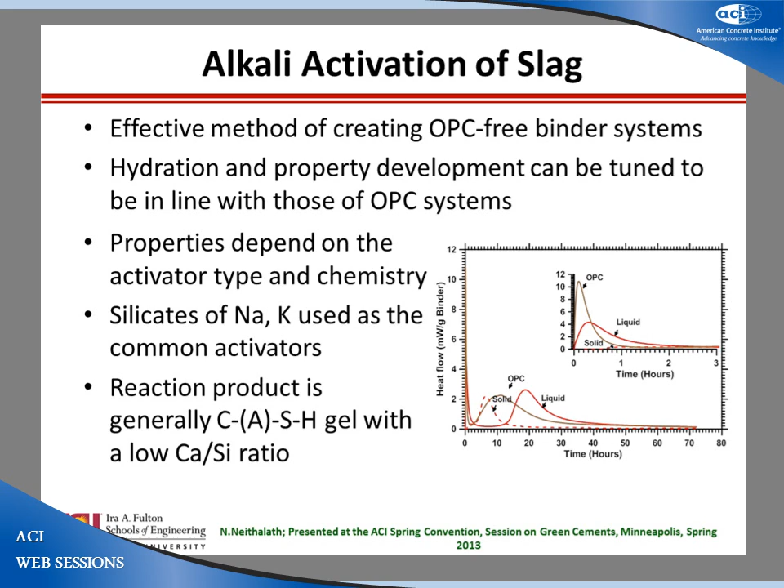We talked in the morning about the activator type and chemistry influencing the process. Typically, sodium and potassium silicates are used. The reaction product is a calcium aluminosilicate gel with a low enough calcium to silica ratio, with sodium and potassium incorporated in the system. But what we are trying to look at is how the long-term microstructure of this material changes, and how that in turn affects the chloride transport.

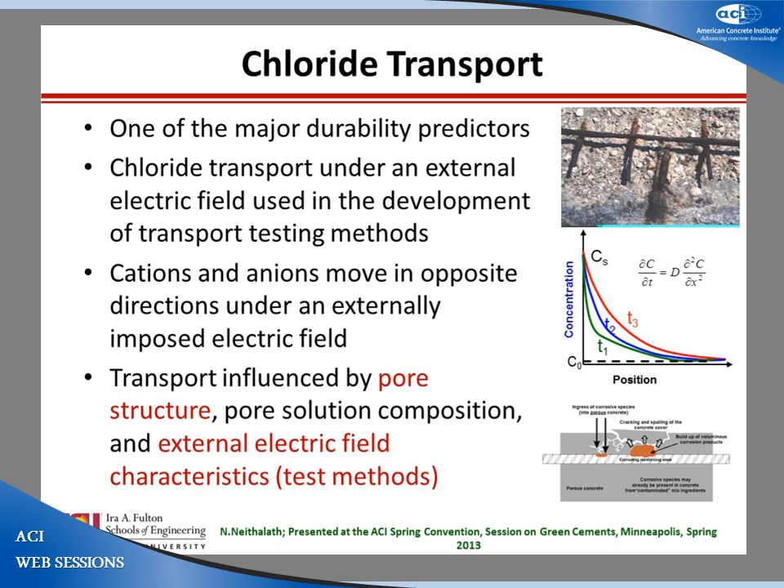We know that chloride transport is influenced by the pore structure, pore solution composition, and the external electrical field, depending on what kind of accelerated test method you use. This presentation looks at two different types of activating alkalis. Typically, sodium silicate or potassium silicate solutions are used because they are better activators. But from a constructability point of view, powders are also better because you can make a one-component, just-add-water system. So we're looking at blends where you use a powder activator blended with the slag.

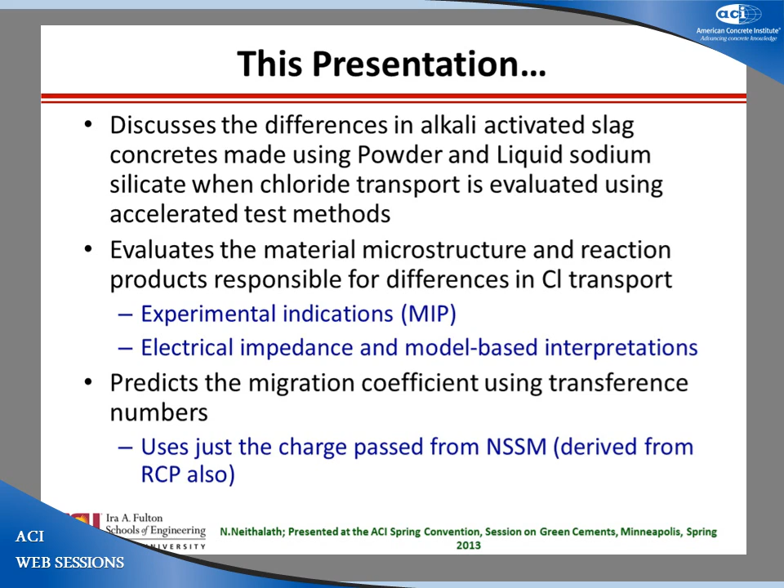But how does the microstructure change with that kind of activation? We look at material microstructure, experimental studies using mercury intrusion porosimetry, and electrical impedance with associated model-based interpretations to show what is happening in the microstructure before and during transport. That gives you a simple method to predict the migration coefficient. This is universal; we have developed it for all types of concretes. I'm just showing the case for alkali activated concrete.

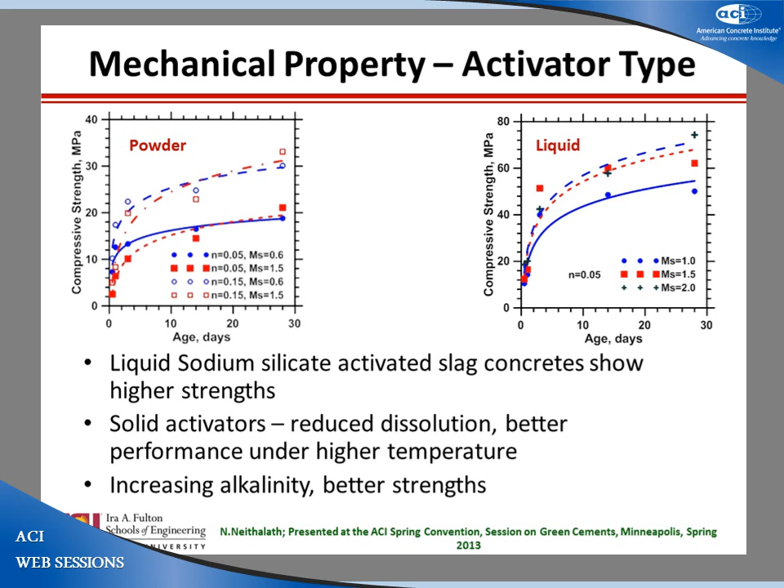Two different slag contents, a total alkali content of 0.05, or 5%, and a higher one for powder too. Sodium silicate with a silica modulus of 2; sodium hydroxide can be used to bring it down to 1.5. Sodium silicate liquid has silica modulus of 2, 1.5 and 1. We did three, but these two are the commonly used numbers. For compressive strength, powder activated mixes give only about 30 megapascals. With liquids, you can go to 80 megapascals or higher depending on the slag. With solid activators you have a reduction in the dissolution. The compromise is a system you can work with quickly without storing liquid separately.

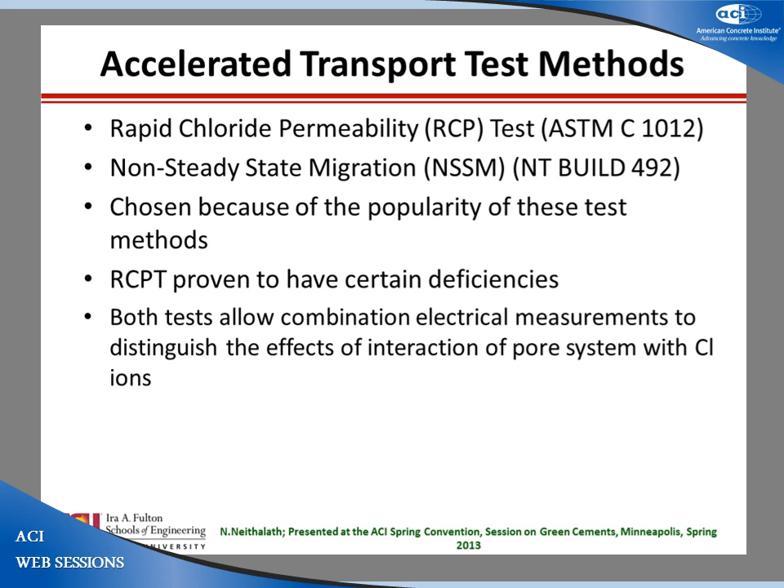For accelerated transport tests, we did the rapid chloride permeability test, which everybody seems to like, and non-steady state migration to get the diffusion coefficients, chosen not for pure science but popularity too. We know RCPT has deficiencies, but the advantage is that both are electrically accelerated, so there are similarities we will make use of in understanding what they do.

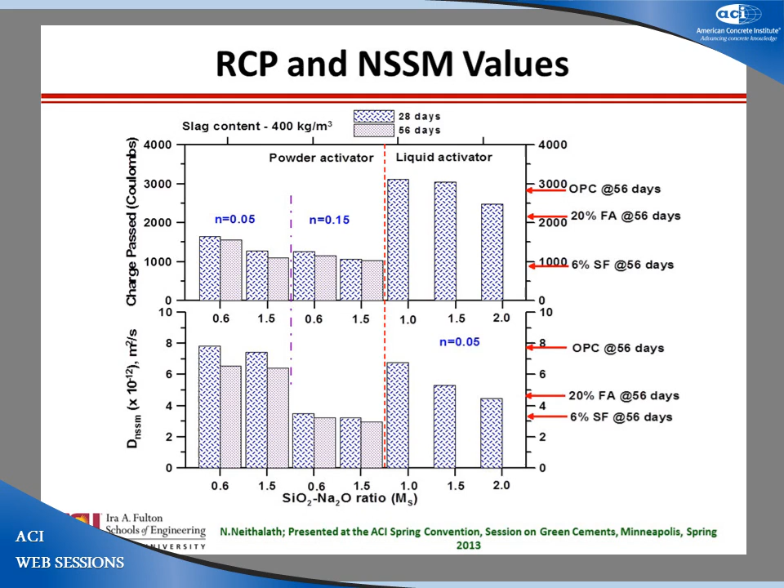So here are the observations which I just told you about already. The important one is that there's no significant change when you have powder activation between 28 and 56 days. It doesn't seem to do anything further. Same trend was seen in the compressive strength results also.

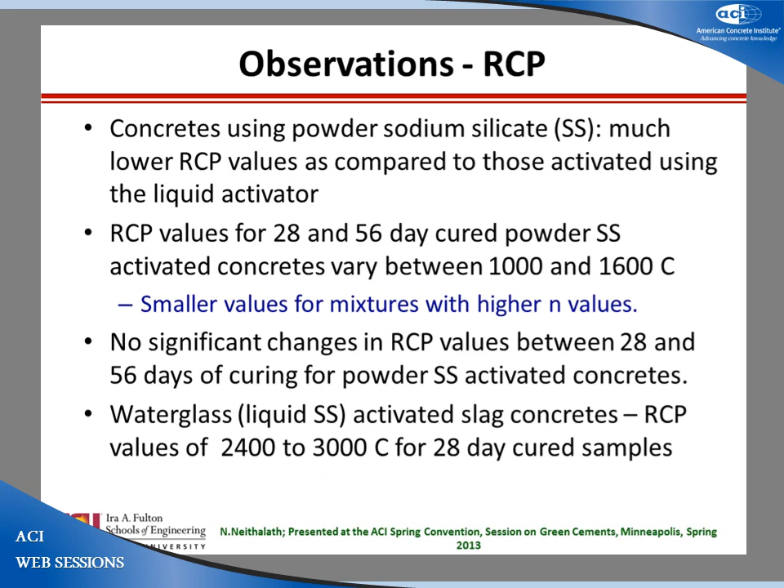With non-steady state migration, again, the results are now much more in line with what you expect. You don't see a dramatic drop for one type of concrete, but the reduction with liquid activated or solution activated sodium silicate increases with the silica modulus or silica content more than the reduction in RCP values, and we'll talk more about that when we do the microstructure.

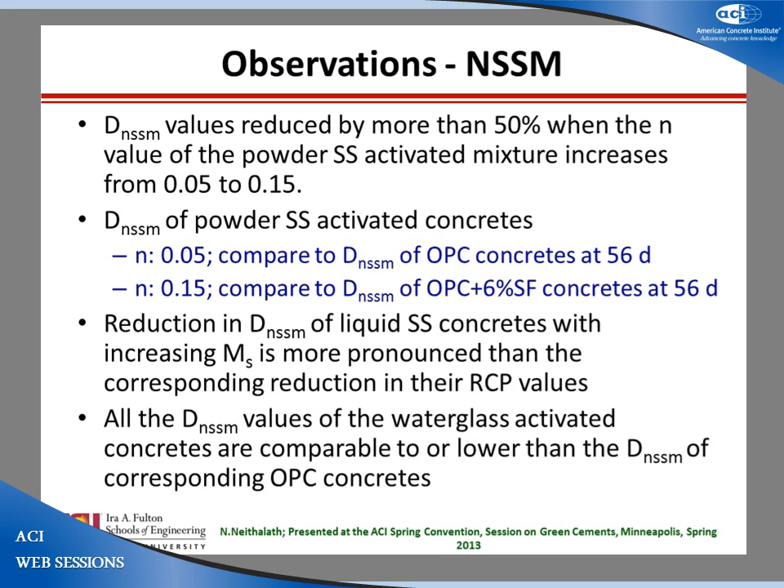So all the values are comparable to or lower than the non-steady state migration values of corresponding OPC concretes, which gives you an indication that yes, you can make them for durability levels comparable to or better than OPC concretes. And remember, the slag content was 300 or 400 kilograms per meter cube, but most of them are 300 kilogram per meter cube mixes. So very low values of binder.

One thing to note, because we have two different activator parameters. One is the N value, which is the sodium oxide content, and the other is the MS, which is the silica to sodium oxide ratio. So if you basically multiply them, you effectively get the silica content in the activator. So you can nicely trend those non-steady state migration values at 28 and 56 days to the silica content in the activator, irrespective of the sodium oxide content for the range that we have studied.

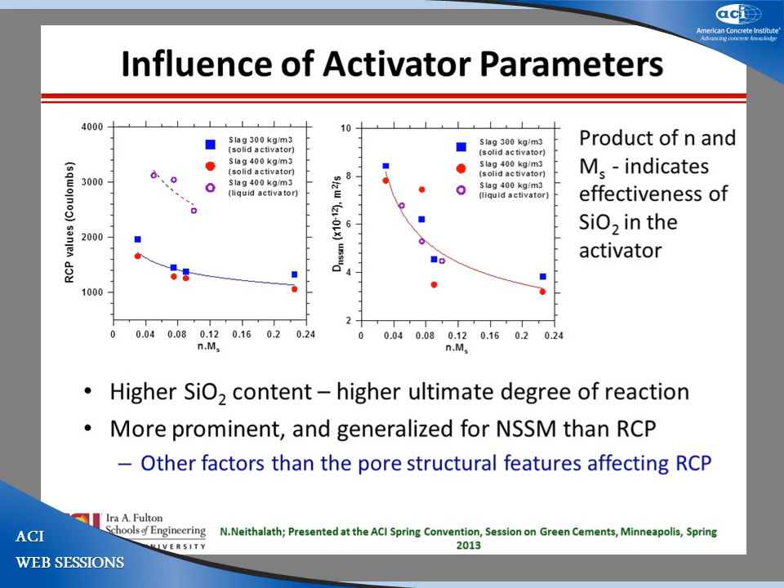It's an easy way to start looking at what kind of values you need for a target non-steady state migration value, something to be used as a guide before you start designing your mix.

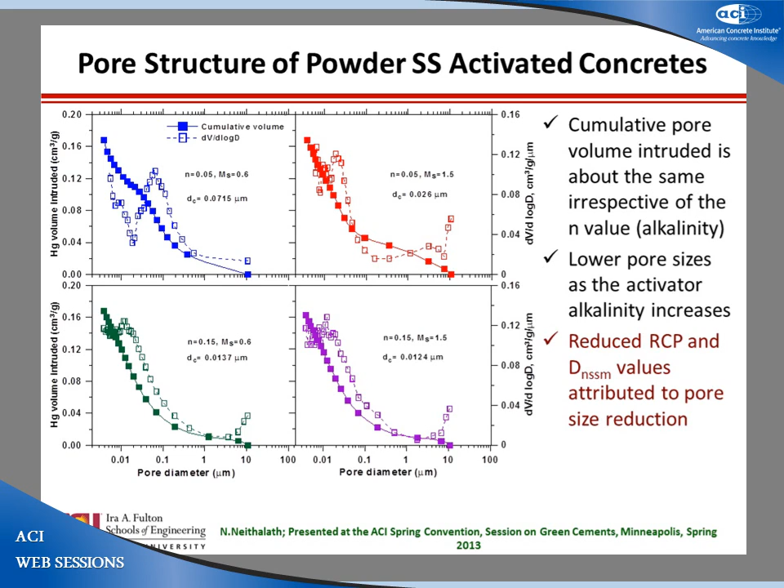Now, the pore structure is quite interesting. What you see here are all pore structures of powder sodium silicate activated mixes at 28 days. You have about 16 to 17% total pore volume, or 0.16 to 0.17 centimeter cube per gram total pore volume for all of these mixes. The pore sizes, though, come down when the alkalinity is higher. So from 0.07 microns, the characteristic pore size comes down to about 0.01 microns. So you can say that reduced chloride permeability and non-steady state migration values can be attributed to pore size reduction. I'll show you some proof of this further down.

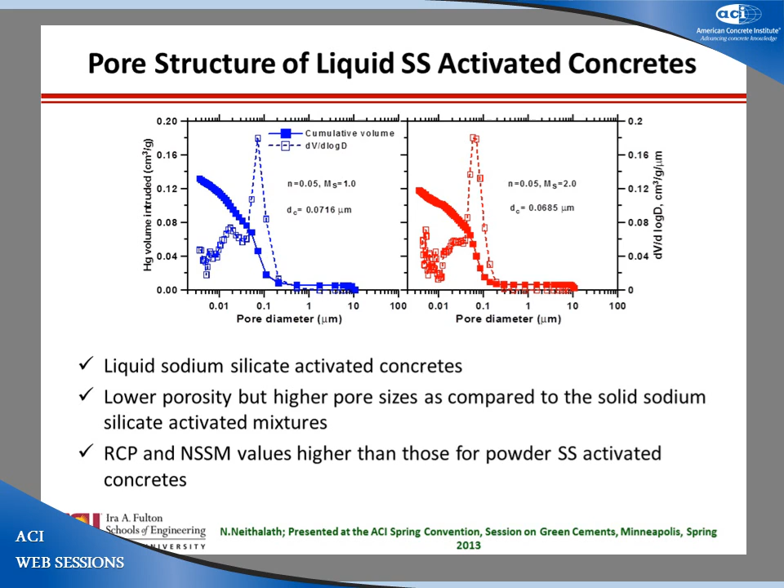But if you look at the liquid activated concretes, you can see that the porosities are much lower. We talked about 16%, you're about 12% porosity now, but the pore sizes are much higher. So lower porosity but higher pore sizes here, and these two have implications on how transport happens.

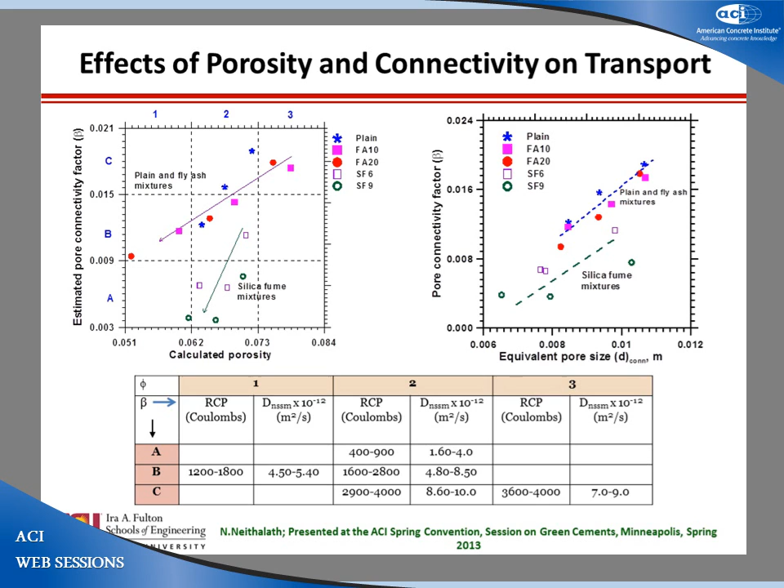So two or three seemingly complicated things, but fairly simple at the end of the day if you think about connectivity being the determinant, and connectivity being determined more by the sizes than the porosity itself within the range of porosities. We're not talking about 60% porosity; the story will be different then. But in normal concretes, the size determines the connectivity more than the total volume of pores.

So one more reason for the pore size reduction in powdered sodium silicate concretes, and we did a lot of work on that. This is Fourier transform infrared spectra of both the powder and liquid concretes. You can see all the liquid concretes will give you that Si-O-Si stretching vibration band at about 970 cm⁻¹, characteristic of a lowly polymerized gel, typical of what you see for C-S-H in cement systems.

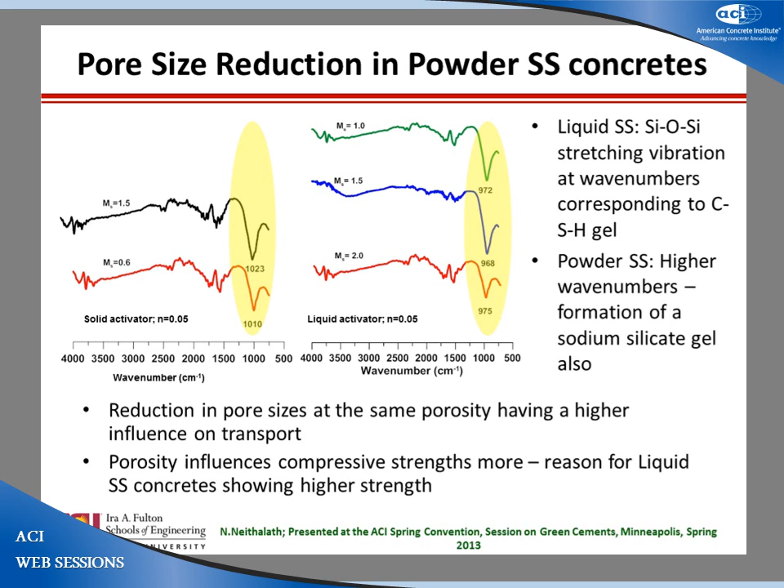And therefore, the pore size is also lower. And therefore, the powdered sodium silicate activated mixes have reduced pore sizes. So they have lower strength. Strength is much more dependent on porosity, so they have all lower strengths, but they can give you better transport properties because of their lower pore sizes. So one thing to look for, even if it's not completely dissociated, one advantage of using a powder activated sodium silicate.

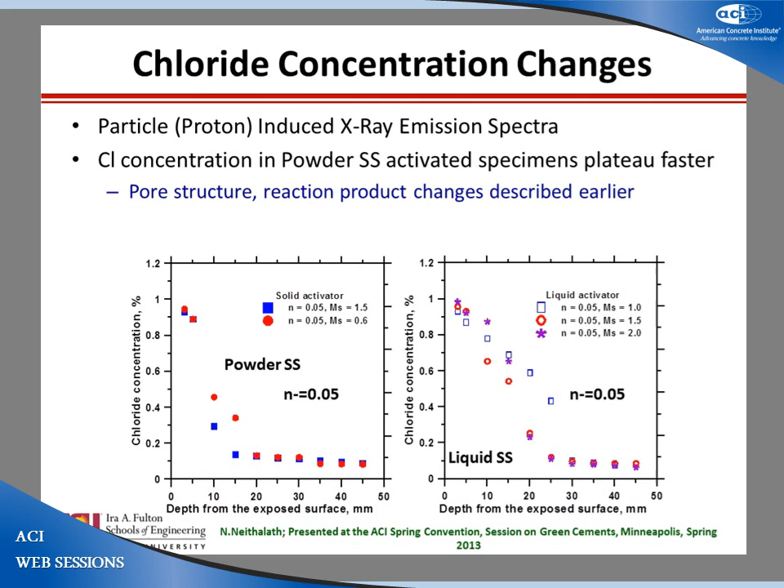Chloride concentration changes over the depth using particle-induced X-ray emission spectra. You can see how for powder and for liquid, now this plateaus very quickly. This takes more time to plateau off. You can fit Fick's second law into it to calculate diffusion coefficient and a lot of other things. And this is a very easy test because you take the entire specimen that was subjected to the test, just do proton emission at different depths and get the concentration profile.

So here are some models to actually bring home the point of what is happening. And this is a very simplified version of the model. So here is your electrical impedance spectra that gives you the real impedance versus imaginary impedance. So this was done from 1 hertz to 10 megahertz frequency range. And here is how we are doing the model for the concrete. So basically you have the electrolyte here.

Chloride ions go from catholyte to the cell and go inside. During the non-steady state migration duration, you are not going to get chlorides here because the breakthrough point has not yet been achieved. So your chlorides are only in the specimen, not going completely. So basically what you can say is my specimen now is just a combination of resistors and capacitors. The pore solution, the pores are the resistors, the solid phases and the interfaces are the capacitors.

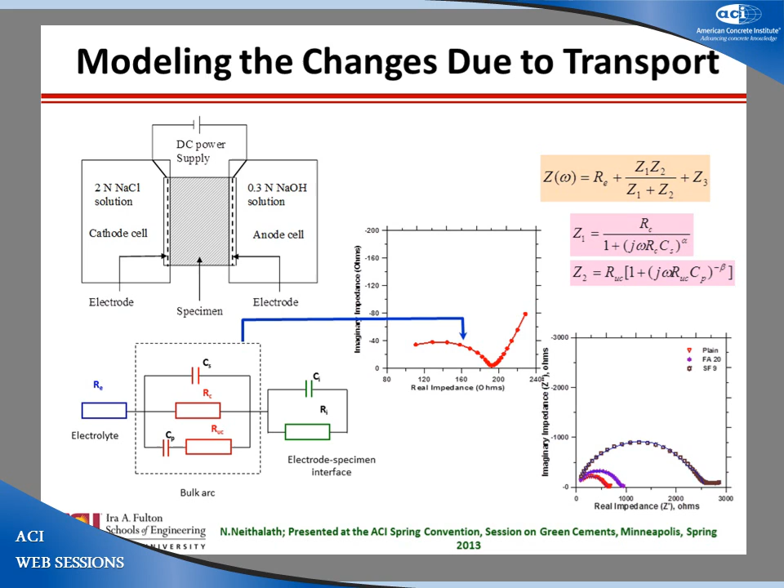So if I use that kind of an analogy, and then if I look at bulk resistances alone before and after RCPT or the non-steady state migration test, you can see that generally after the RCPT test the bulk resistances come down, whereas after the non-steady state migration for a longer period of time your bulk resistances slightly go up. And I'll talk to you more about why that happens.

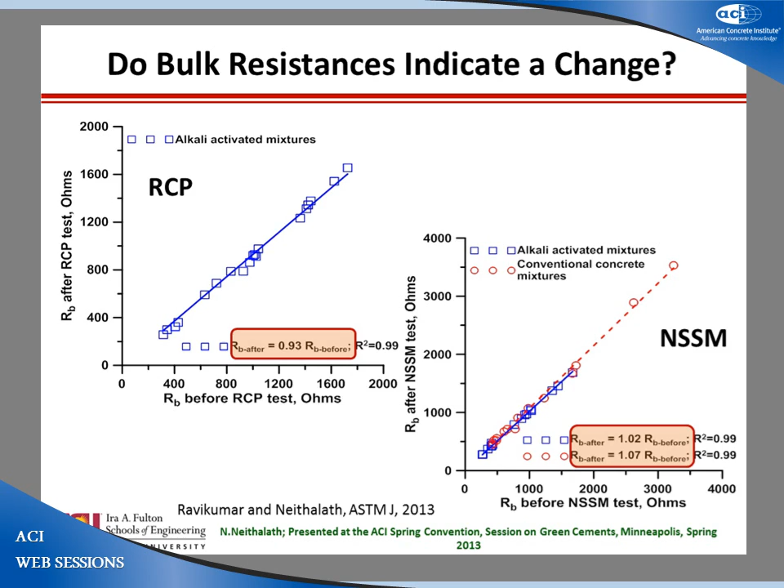So if you look at changes in the resistances, overall resistance really doesn't change because only very small amounts of chlorides go in. So if you look at the effective resistance before and after, almost no change. But if I break it down into the connected pores and the unconnected pores, you can see the resistance of the connected pores goes up, which means connected pores are becoming more disconnected because you have some products being formed. For the unconnected pores, you have to have that balance because this value is roughly the same. The unconnected pore resistance goes down.

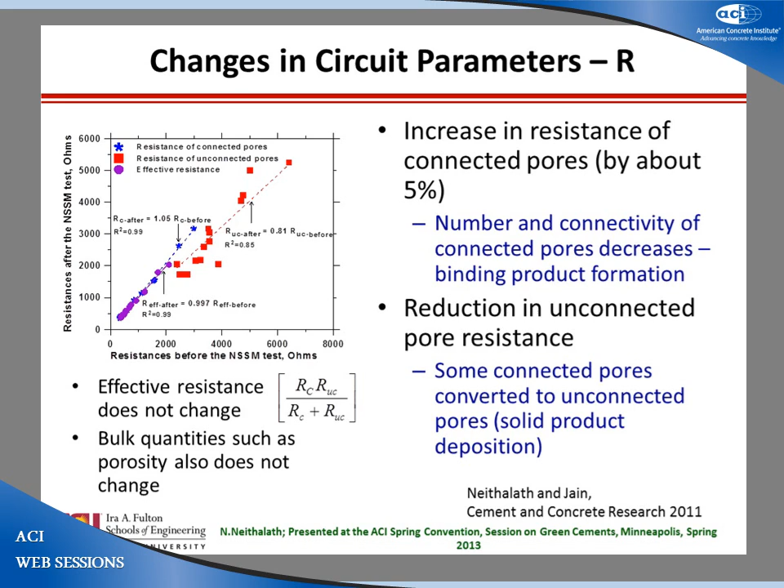So the idea is number and connectivity of connected pores decrease. The same idea that I told earlier, that you have changes in connectivity, consequently pore sizes, and the change in connected pore resistance because some of the connected pores are converted to unconnected pores because solid products started to deposit. So we use this simple model to show what happens in resistance. And with that, we can explain what is happening here.

So before and after, with non-steady state migration before and after. So connected and unconnected pores are more conductive after chloride transport, but more resistive with a much longer term migration test that is slowly starting to change the characteristic of the pore structure, especially in these systems, as I told earlier, because the pore sizes are much smaller.

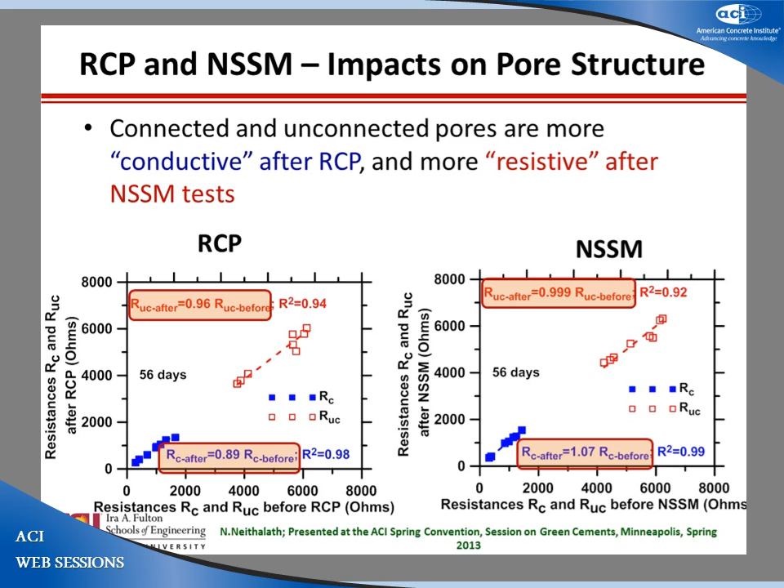Now, capacitances are also interesting because if you start to track capacitance and how capacitance has changed with time, you can look at understanding the solid product formation at the interfaces. So you can see this is capacitance. This is the interfacial capacitance. You can see about a 50% change in interfacial capacitance.

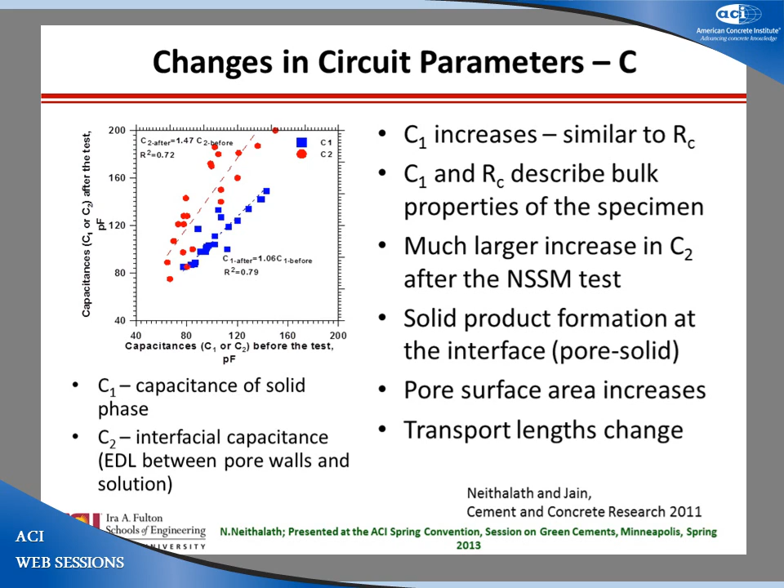This is for conventional concretes after you do a non-steady state migration test. So if you look at that, you can see that alkali activated slag and OPC concretes follow a very similar trend with non-steady state migration.

So the takeaway from here is if you're doing an RCP test with alkali activated mixes, be a little careful, because it is dependent on the pore solution conductivity, the microstructure, the electrical properties, all of that. We like to use RCPT because it's pretty quick, you get a lot of good results, but for alkali activated concretes, RCPT will make them look better than what they are. Exactly like, if I may say, silica fume concretes.

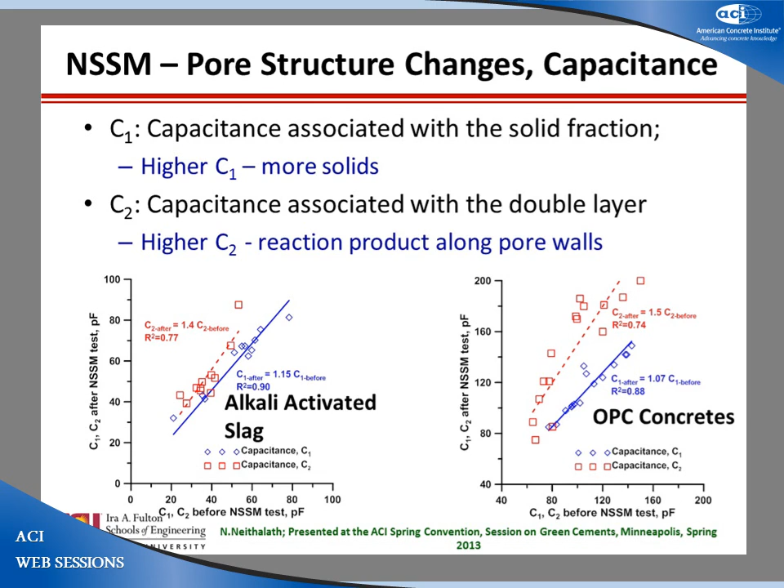But non-steady state migration, which is 24 hours, gives you a much better indication of what's happening in the pore structure, at least from a point of view of comparison with OPC and alkali activated slag. You can see much similar behavioral trends when you look at the microstructure and how that changes with time.

A quick way to predict the chloride content, and this is applicable to all types of concretes, is based on transference numbers. We are basically using the total charge passed as an integration of the current over time, and then you're essentially saying that, okay, I have non-steady state migration, which means I don't have chlorides on my anolyte cell, which means all the chlorides are either in the catholyte or in the specimen, and whatever is in the specimen is much lower compared to whatever is in the catholyte because I have a very high concentration of chlorides in the catholyte.

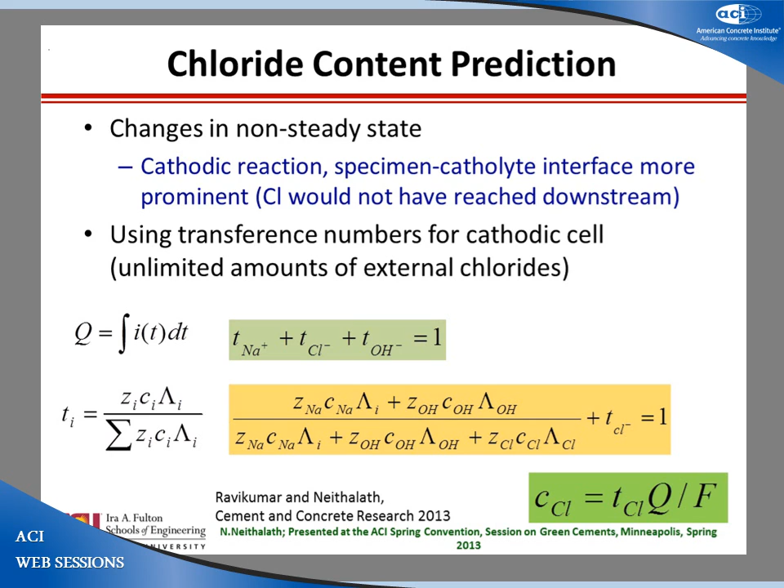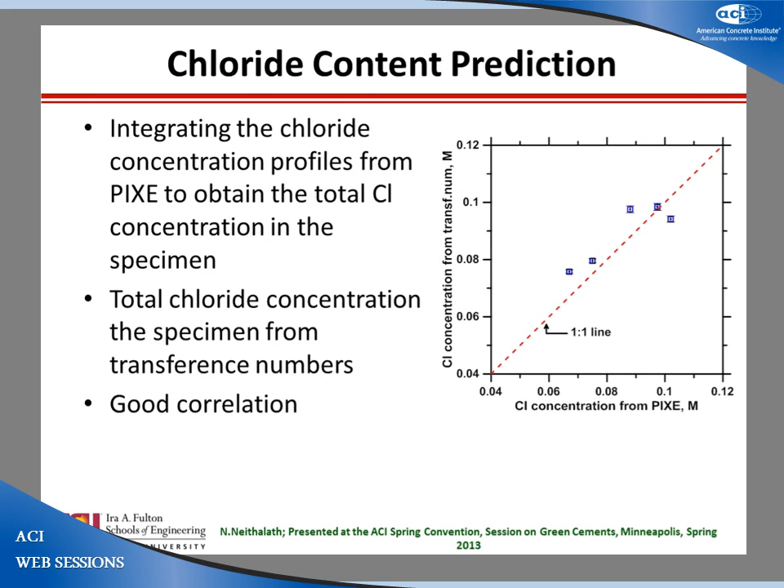So you can actually look at equating the transference numbers. You can do some simple operational procedures to do that and get the chloride concentration as transference number of chlorides times Q over F. F is the Faraday number. And the comparisons between chloride concentrations from transference numbers and a few mixes that we did using PIXE: very nice correlation and very consistent results too.

And if you want to predict the non-steady state migration coefficient, you can play around with Fick's law a little. Crank's book on diffusion gives the solutions for all of these. There are a lot of software. For example, MATLAB now has a new inbuilt Fick's solver. Fairly nice. So you can actually look at the total mass of chlorides that went through, and then you can find the non-steady state migration coefficient.

Basically all you do is measure the charge, and if you can really get a correlation in the lab, I can do only a half hour RCPT or half hour charge measurement, compare it, have a calibration chart, extend it without doing a test, and you can actually predict the migration coefficient.

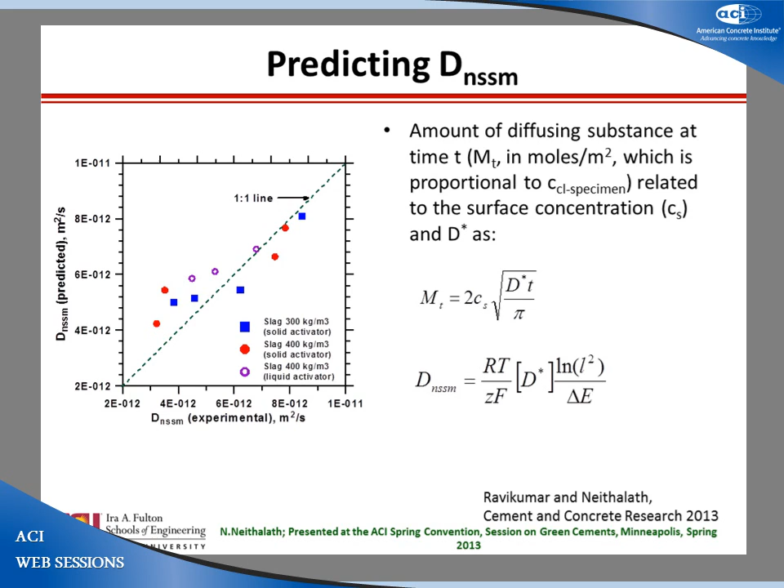It makes a very easy, quick test, and then you can use this back to predict, based on what migration coefficient you want, what activator content and activator concentration you need to get a certain transport property, a certain strength. So it gets you a big picture combining both mechanical properties and durability with mixture proportioning. We still have to draw some more lines in between the triangles, but the three corner points are there, which we can use as a base.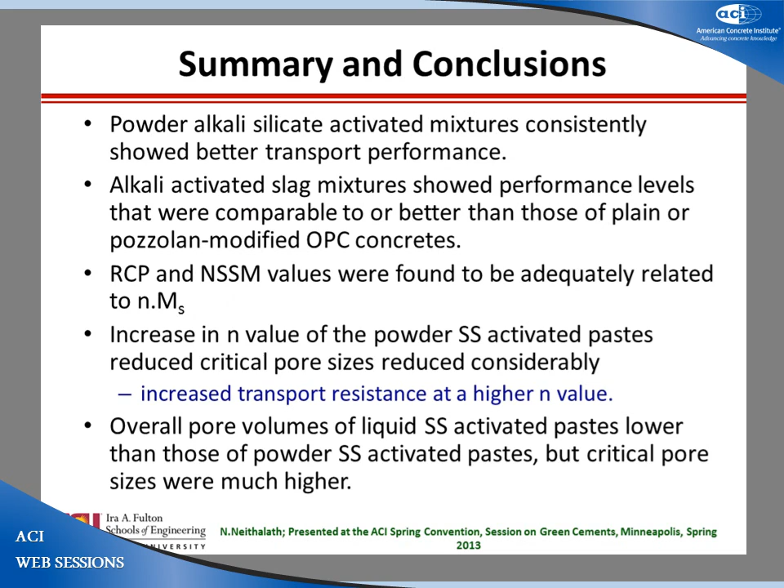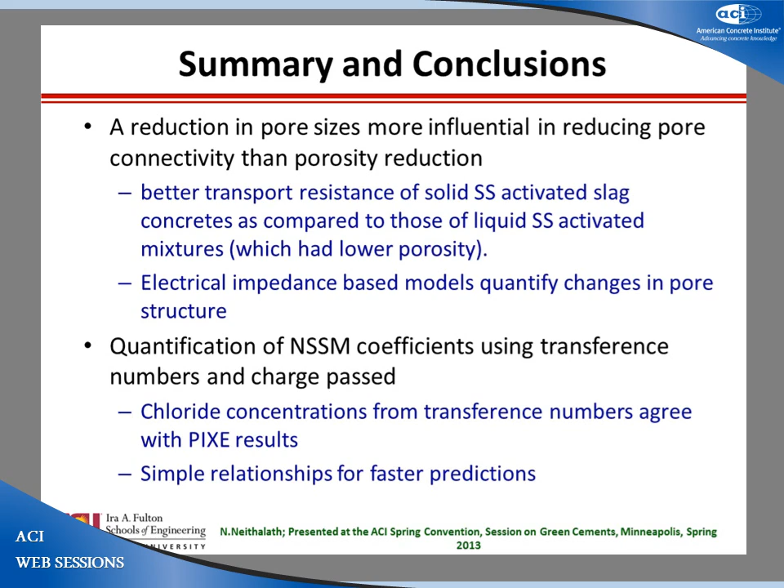So just to summarize, I'm not going to go through all of that. Powder mixes consistently showed better transport performance, comparable or better performance for all these mixes compared to OPC concretes. Overall pore volume effects, which we talked about. Reduction in pore size is more influential in reducing pore connectivity, and quantification using the results that I showed. Faster predictions.